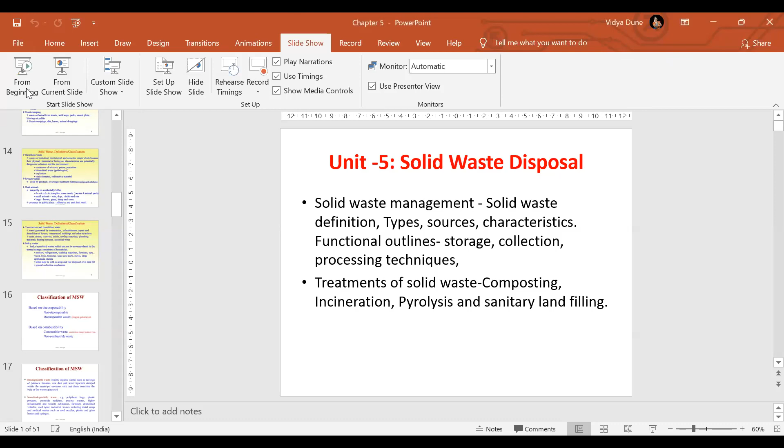I will start the presentation immediately. A solid waste disposal chapter. In that we are going to study about solid waste management, then its sources, then functional outlines, storage, collection, and its processing. Okay.

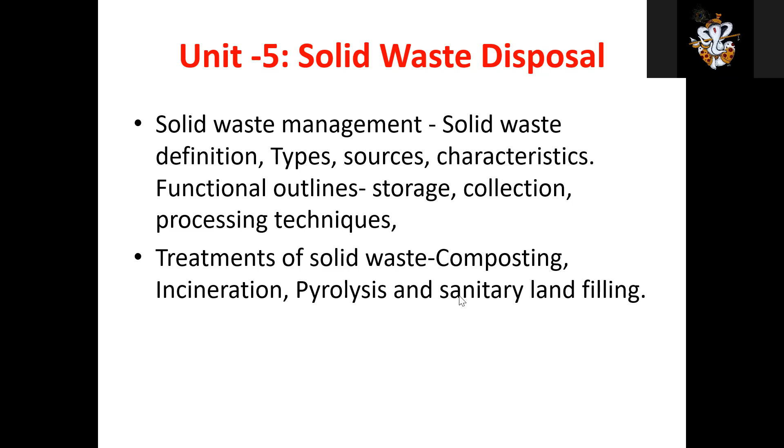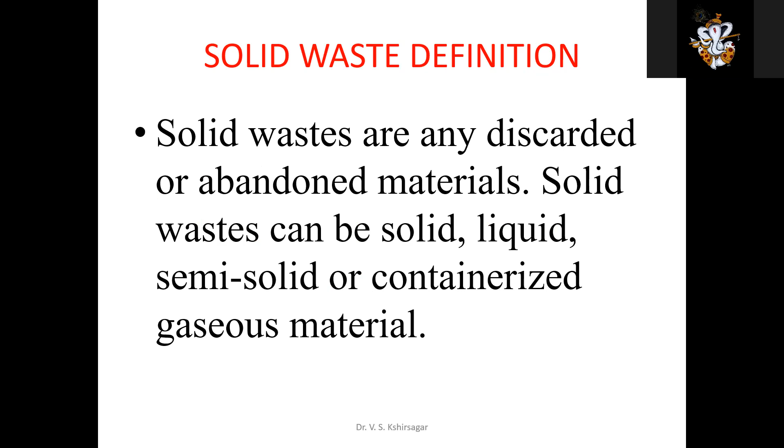Okay, treatments of solid waste. So the first part we finished in yesterday's lecture. Now we are going to study the second part. Okay. This is the solid waste definition: discarded or abandoned material. Okay. So we have discussed the definition also. There are different types of definitions.

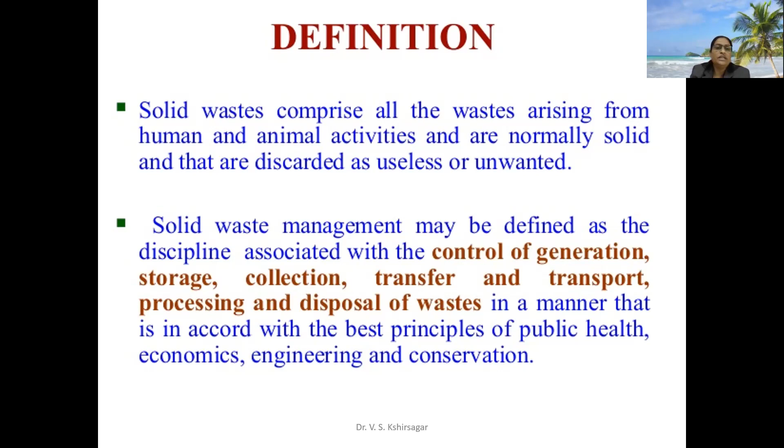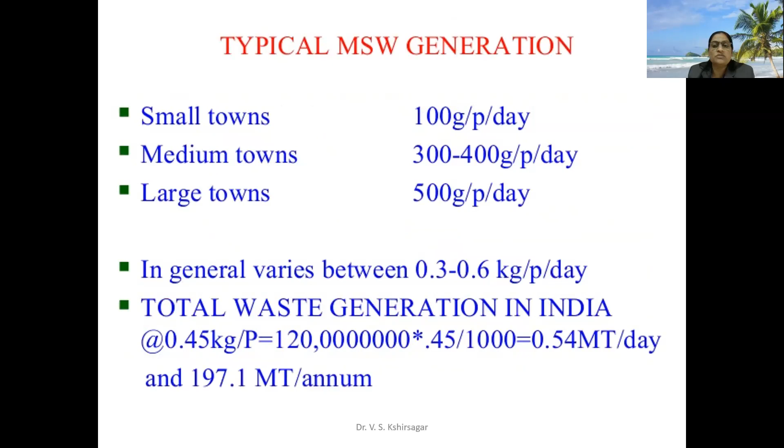Okay, whatever useless or unwanted material in solid form will be considered as solid waste. Then we discussed the typical municipal solid waste generation rate, and in that I told you India, as a developing country, ranges between 0.3 to 0.6 kg per capita per day. Okay, and after that we have seen the different types of classification of solid waste.

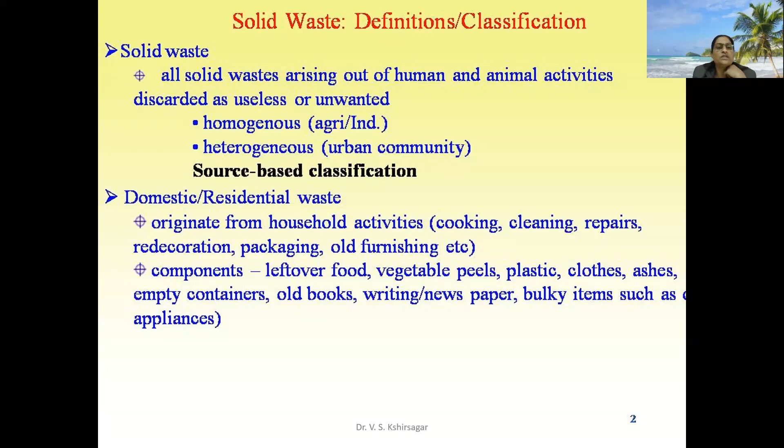In that, solid waste is basically classified into homogeneous or heterogeneous. Homogeneous in the sense uniform, same type of solid waste, likewise from a specific industry or specific area of agriculture. Then heterogeneous, under that there will be a variety of solid waste. Okay. Then source-based classification. Under source-based classification we discussed domestic waste, commercial waste, institutional waste, municipal waste, industrial waste, agricultural waste.

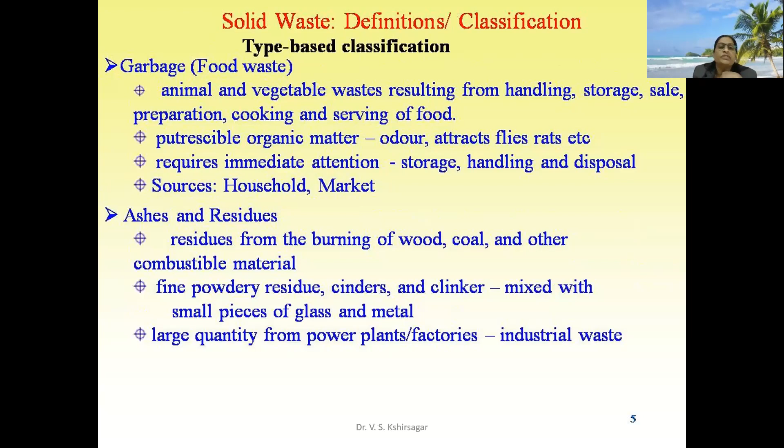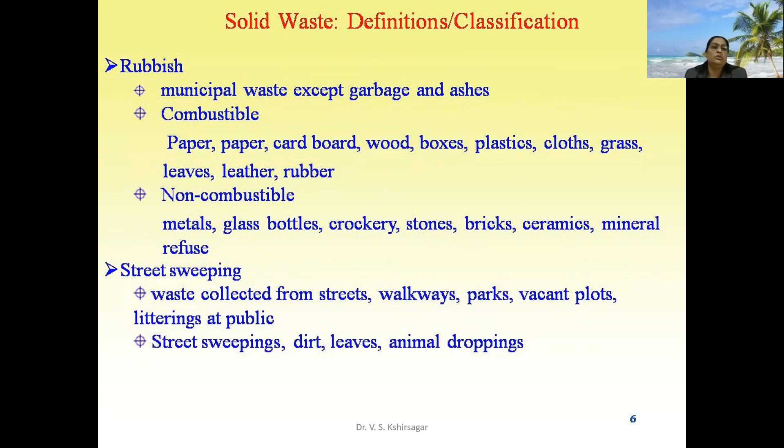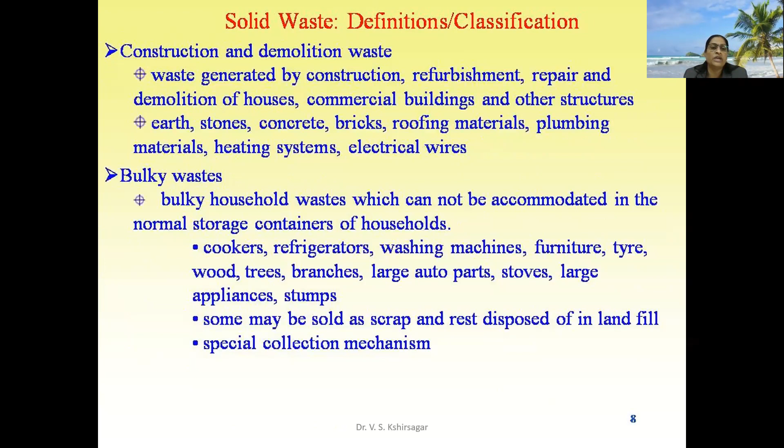Further, we discussed the various types of solid waste in type-based classification. In that, garbage, which includes putrescible organic waste material, then ashes or residues, then rubbish; apart from ashes and garbage, whatever part is there from the municipal corporation will be included under rubbish. Then street sweepings, hazardous waste, sewage waste, dead animals, construction and demolition waste, and bulky waste. So these are the various types of solid waste we discussed in detail in the last lecture.

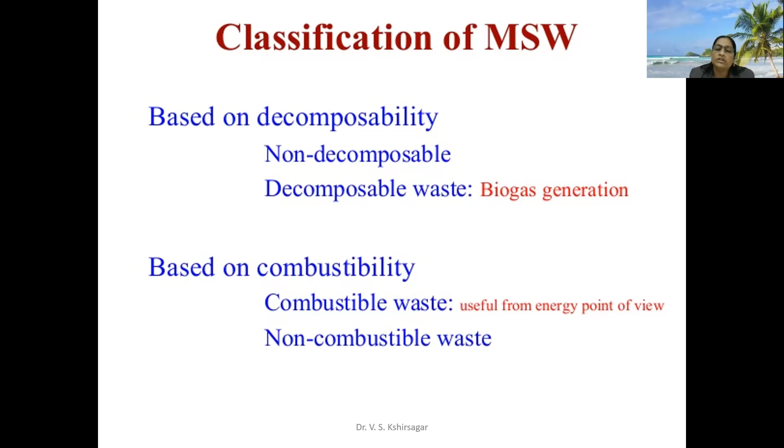Then based on combustibility, it is also classified into combustible waste and non-combustible waste. Combustible waste produces energy, and non-combustible waste does not. But like the non-decomposable material, we can send the non-combustible material also to the same industry as a raw material, or we can reuse it, recycle it. Okay. Then this we have discussed.

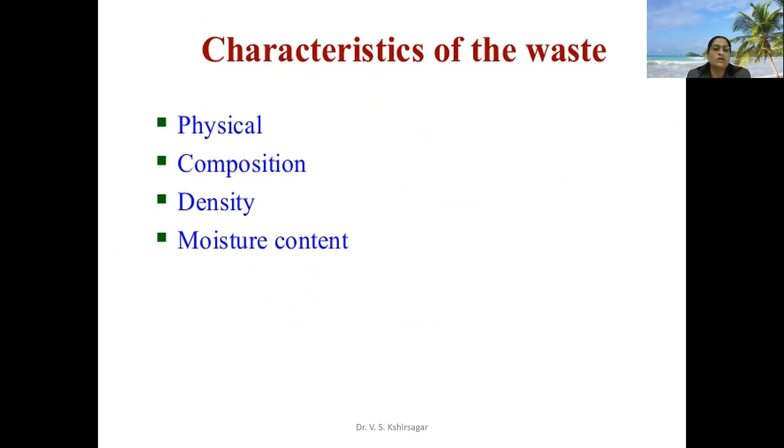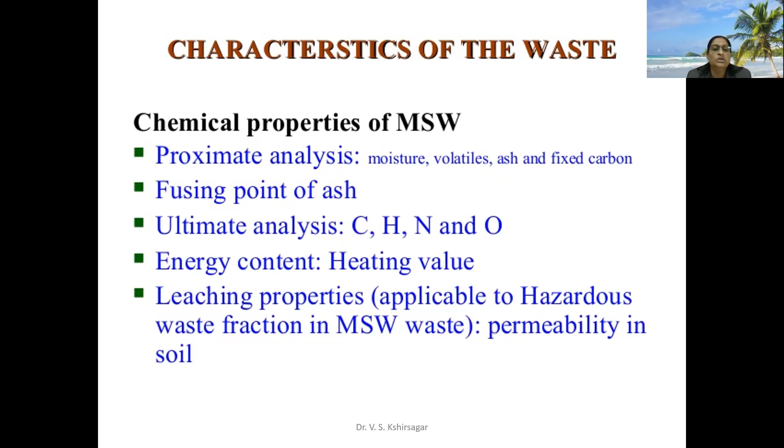Then we discussed the various characteristics of solid waste: physical, chemical; under physical, composition, density, moisture content. Then chemical properties we discussed: proximate analysis, ultimate analysis, fusing point of the ash, energy content or heating value, and leaching properties. All these characteristics we have discussed. And the last point we discussed was the functional outline, meaning how it can be collected from the source up to the disposal spot.

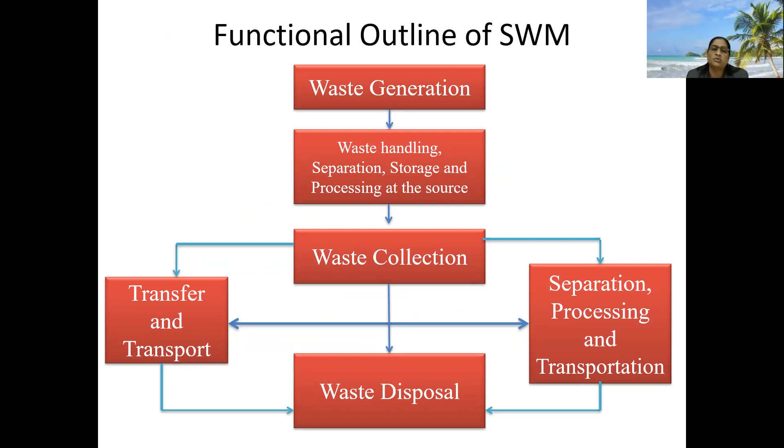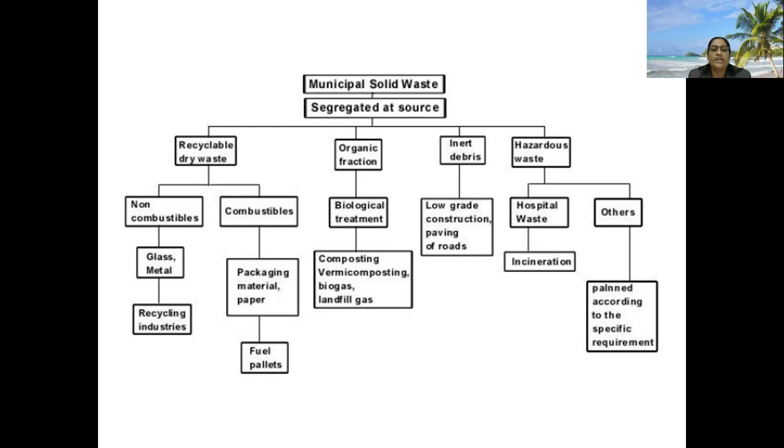Okay, so why do we need to go for segregation? Because only after segregation can we go for proper dissemination of that waste. If it is recyclable waste, then combustible or non-combustible again needs to be classified, and accordingly we can send it. That's why segregation is an important step at the source. Otherwise, collecting together and mixing up will create efforts to be taken towards separation later on.

Whenever you are talking about the disposal of solid waste, you should remember the 3R formula. What is this 3R formula? First R stands for reduce, second R stands for reuse, third R stands for recycle. Reduce means at the source itself, you should work on reduction of solid waste. I can give you an example. Suppose you are using a newspaper for reading purposes. Okay, with one example I can explain all three parts. Basically we use a newspaper for reading the news and getting to know information about various aspects.

Okay, then if you want to reuse the solid waste, in that case the same paper you can use for multiple other tasks, wrapping purposes or covering purposes. So a variety of work you can get done with the same paper. Then recycle: if all this work is done with one single paper, then you can send it for recycling to the same industry as a raw material.

Same example you can take the plastic. First of all, you should reduce the use of plastic. You should not go for plastic until and unless it is required, because you know that it is harmful to the environment.

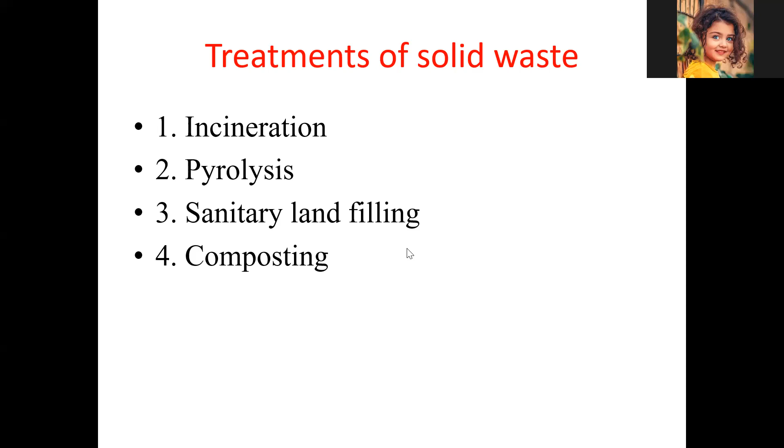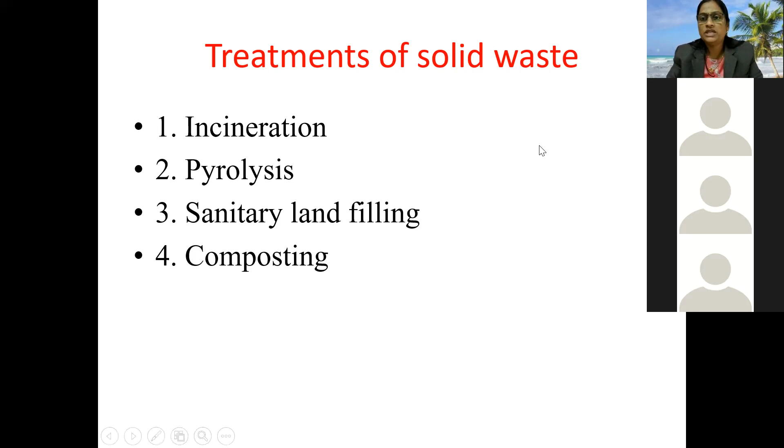Incineration. Now we will talk about incineration first. Incineration means what? It is closed conduit burning at a very high temperature. At high temperature you can burn, even metals also can be burned.

Specifically, incineration can be used for septic hazardous type of material, meaning biomedical waste as well as hazardous material, toxic material, which are going to seriously damage the environment. In that case, we can go for incineration because it is a complete burning.

The biggest advantage is that incineration is performed in the presence of oxygen. Higher temperature can be raised to the highest level. Another biggest advantage of this is volume reduction - around 80%, 90% volume will be reduced.

With respect to solid waste, we discussed that 0.3 to 0.6 kg per capita per day is the solid waste generation rate. If this much generation rate is there, you can imagine - Modi ji says that India has 125 crore population, and multiply that across 365 days. So in 1 or 2 years, if you are not performing any activity to dispose of solid waste properly, entire India will get covered with solid waste itself. I'm trying to make you clear how this scenario is going to be affected, so that's why we need to control it properly.

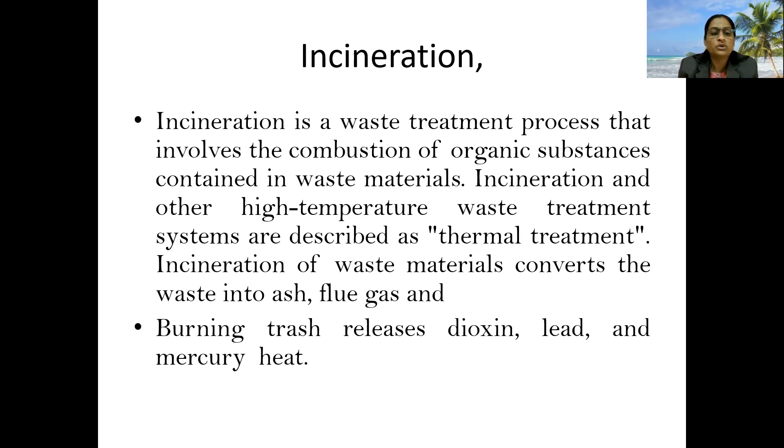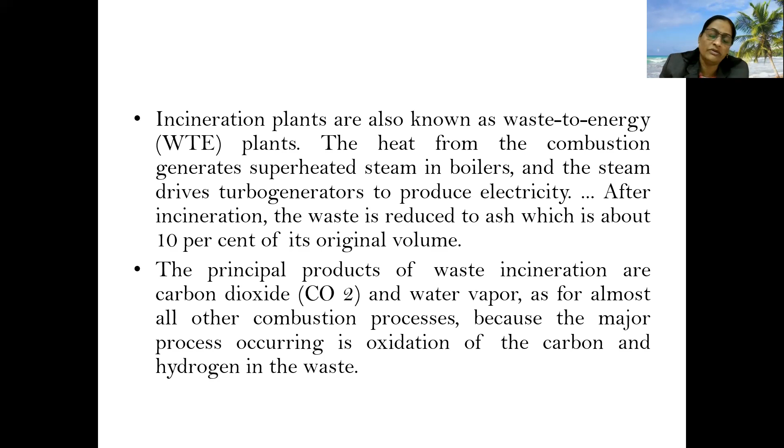So bottom line, once again I will give you a recall of incineration. Incineration is a thermal treatment process. It can be used specifically for biomedical waste and hazardous waste. This process is burning, performed in presence of oxygen - meaning this is combustion, performed in presence of oxygen. Then there's a reduction of volume up to 10% of its original form, and emission of odorable gases needs to be cleared or passed out through the stack or chimney, and then heat generation can be accumulated and converted into useful form. So this is about incineration.

Now another technology we are going to talk about is pyrolysis. Pyrolysis is a process of chemically decomposing organic materials at elevated temperature in the absence of oxygen. This process is also one kind of burning, but it is in the absence of oxygen. A very simple or common example I can give you to understand the concept of pyrolysis is the preparation of rice in a pressure cooker. Are you getting it?

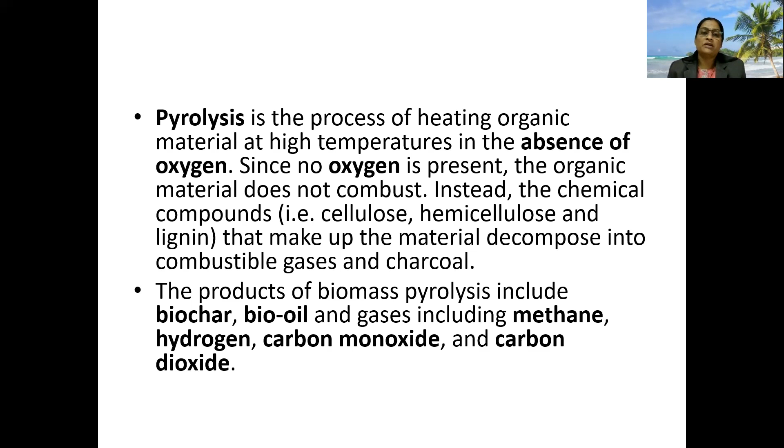So the products of biomass pyrolysis include biochar, bio oil, and gases including methane, hydrogen, carbon dioxide, and carbon monoxide. These are the products we can get from the process of pyrolysis.

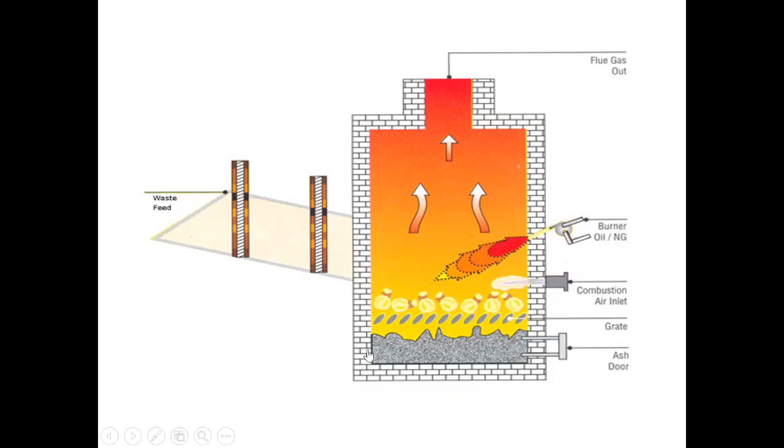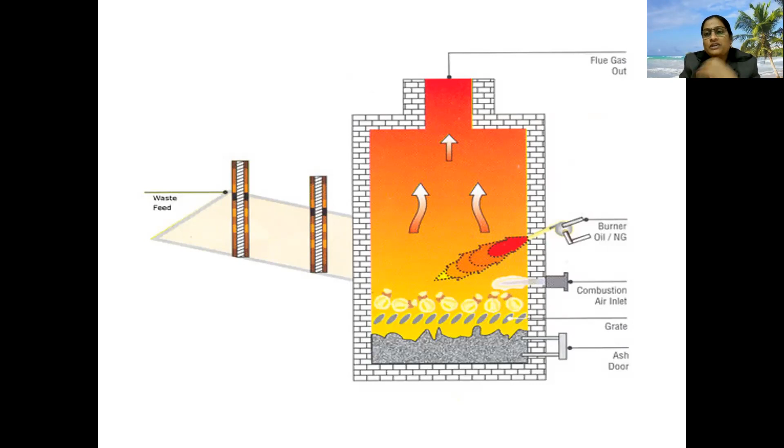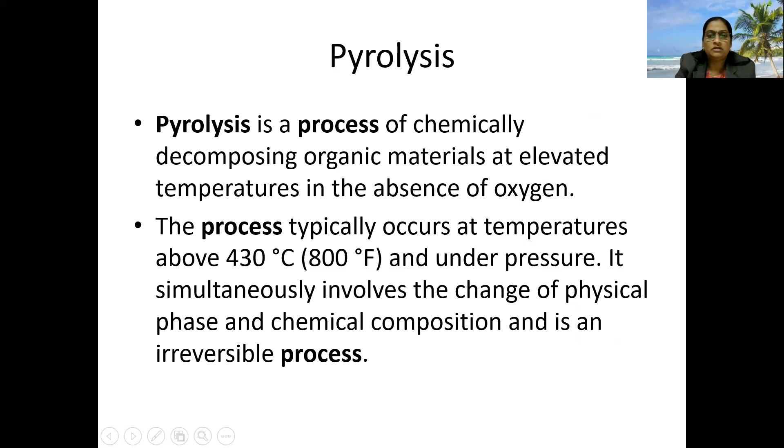Vidya and Snehal replied that it is over. I assume that others... oh my God, this figure is different. Are you sketching the same figure? Or are you not sketching? When did it change from my side? Shit. Have you drawn this figure? Yes, ma'am. Okay, yes ma'am. Okay, good.

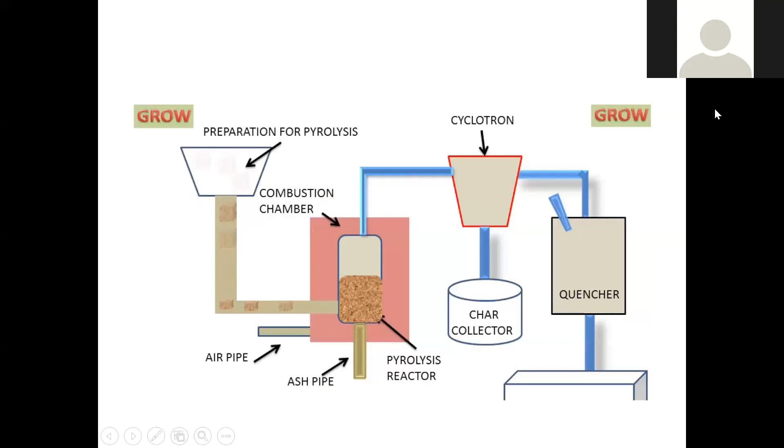Here the process is shown in short: the preparation for pyrolysis, combustion chamber, air pipe, ash pipe for removal of ash particles, pyrolysis reactor. Then the gases can be collected to cyclotron, and then charcoal will be collected at the bottom.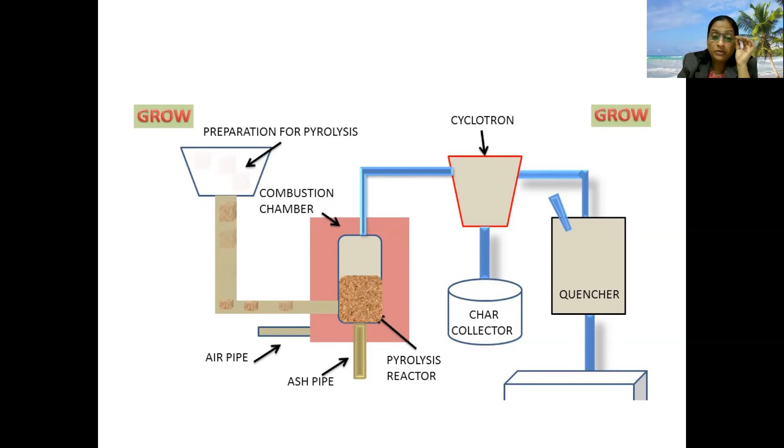This is a little complicated process. I'm not understanding the quencher part properly. I have added that figure, but I'm not properly able to explain that. I will understand it and explain this figure in the next lecture.

In general, the pyrolysis of organic substances produces volatile products and leaves a solid residue enriched in carbon, char. Char is the charcoal. The process is used heavily in the chemical industry, for example, to produce ethylene, many forms of carbon and other chemicals from petroleum, coal, and even wood to produce coke from coal. So these are the multiple types of products that can be developed from the process of pyrolysis.

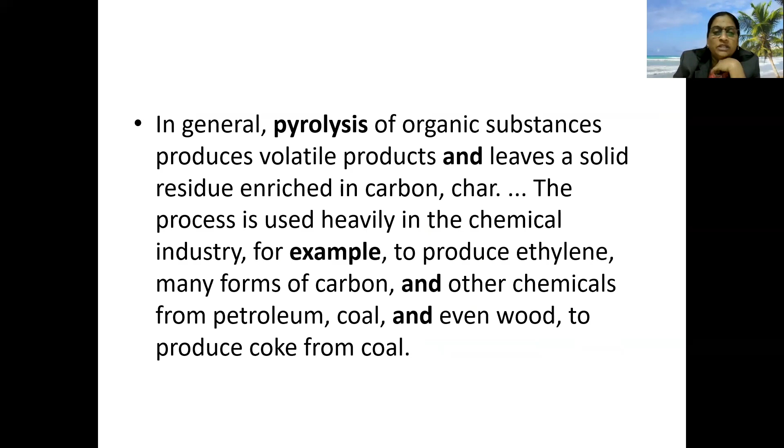So it is an effective method for disposal of solid waste. Okay, what are the disadvantages of pyrolysis? The primary disadvantage is that the product stream is more complex than for many of the alternative treatments.

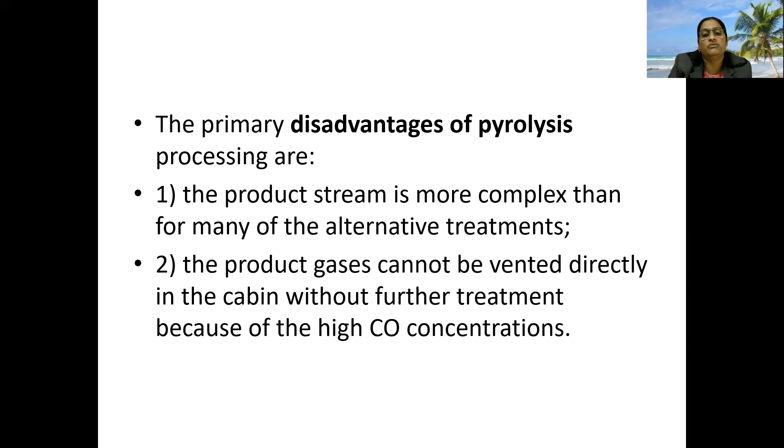Incineration is an exothermic process, while pyrolysis is an endothermic process, which needs to absorb a large amount of heat, while the end products of pyrolysis are fuel oil and fuel gas, which are convenient for storage and long distance transportation

as a heat source. Okay, बऱ्याचदा आपण बघतो बघा, कोळशाच्या गाड्या जातात from कोळसा. That कोळसा, that is not only we are using for the adsorbent purpose, we can also use as an energy source. Okay, burning purpose. So this is the difference between incineration and pyrolysis method. Okay, any question about incineration and pyrolysis?

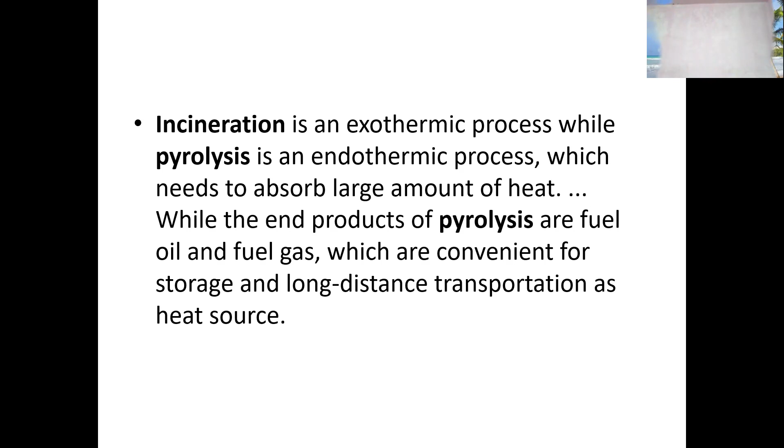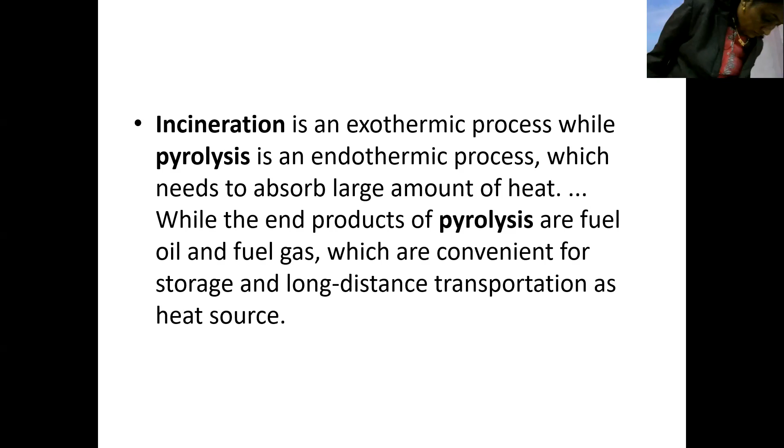I will take 1 minute break. No question, no doubt. Okay, we'll proceed.

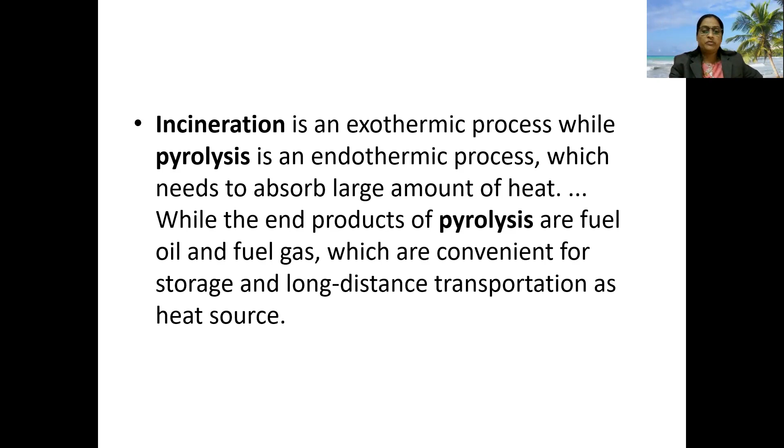Okay, next treatment method we are going to talk about is sanitary landfilling, or open dumping. Sanitary landfills are the sites. Background I will give you before starting the process of landfilling. You know that whatever solid waste we collect, we have a habit to either dispose beside the area or burn it simply. Okay, if it is burning, it is producing air pollution.

If it is thrown away, and if it is decomposable material, and if you are not providing a controlled system for decomposition, then also it is going to get decomposed.

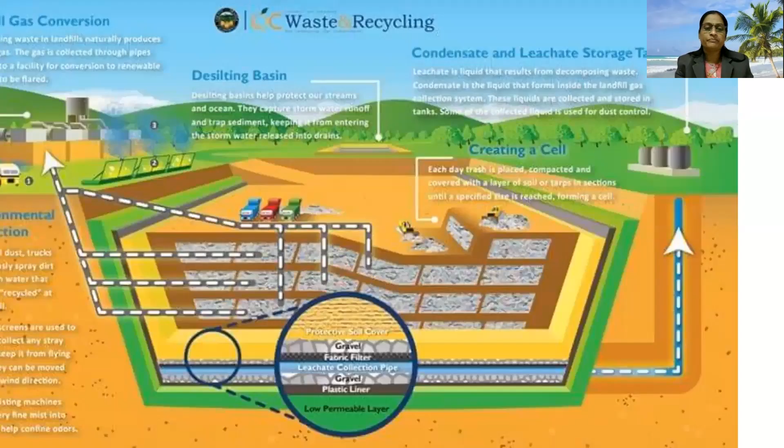And what are the sanitary landfill features? I will show you with the figure first, and then we'll come back to this. So you can look at this figure. There are many cells formed. First of all, solid waste. This brown, ash color is for the solid waste. Then it is covered with soil, compressed by applying pressure, and again there will be another cell of solid waste, again covered with soil, again compressed by applying pressure. Likewise, multiple layers can be formed until it reaches the ground.

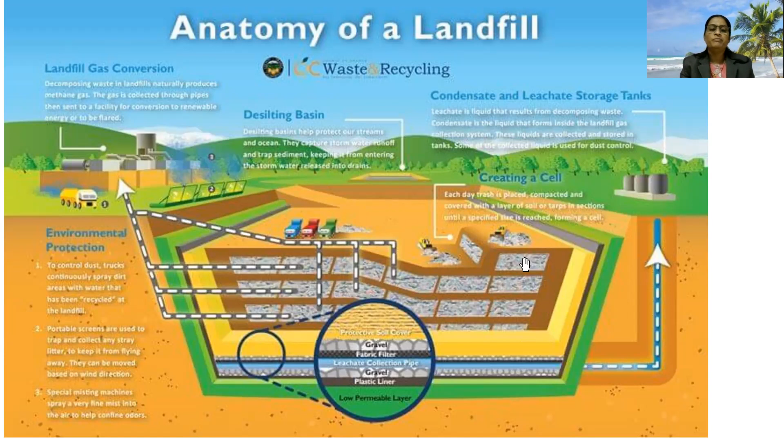It is a subsurface level process. So until it reaches the ground, multiple alternate layers of solid waste and soil can be formed, and every time it will be compressed by applying pressure. Okay, so compression is for volume reduction. Then I will go back to this other figure. Here the cell formation is not shown, but it is like this. You can look at this figure here, collected leachate. A slope is given to one side of that particular pit, because the slope will help collect the liquid waste generated during decomposition, that is leachate, towards that end. And from there, it can be pumped out.

So instead of allowing it to percolate towards the ground, it will be collected from that spot directly by providing a pumping system. How is it going to be collected at this corner? Because we have provided a slope. Is this the only reason? No, because we have restricted it from percolating towards the ground by providing a plastic liner on the inner side of this particular pit. So it will not be allowed to percolate towards the ground. This plastic liner will restrict that.

Then another issue, there is production and emission of gases. So these multiple pipes are provided for the emission of gases produced during decomposition, and this can be collected and recovery of the same gas can be performed by further processing. So this way sanitary landfill helps to reduce the volume of solid waste, first thing. Second, it is not only for the reduction of volume, it will also not allow odorous gases into the atmosphere, not allow the leachate to percolate into the groundwater table, and the process of decomposition will be performed effectively. Okay, so let me

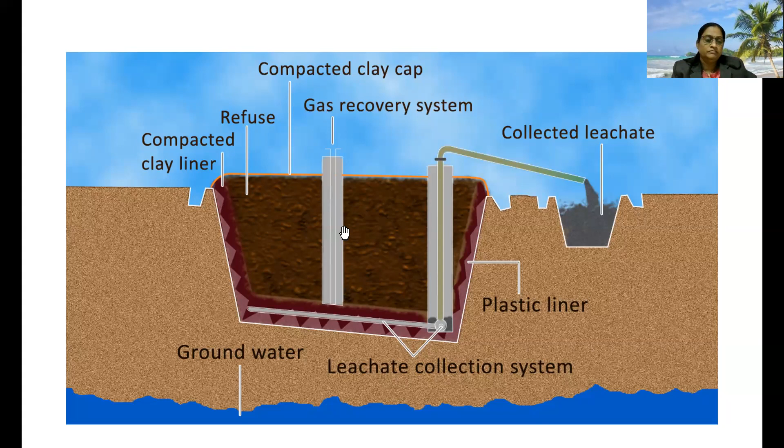This is the anatomy of a landfill.

Okay, we'll go with the slide. Sanitary landfills are sites where waste is isolated from the environment until it is safe. It is considered safe when it has completely degraded biologically, chemically, and physically. In high-income countries, the level of isolation achieved may be very high.

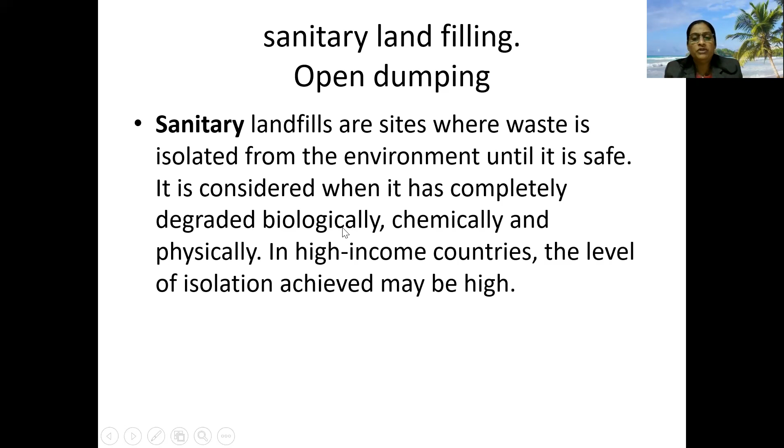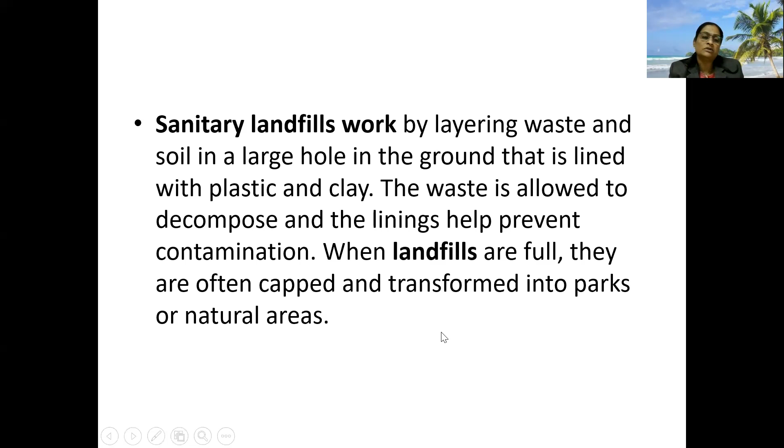Sanitary landfills work by layering waste and soil in a large hole in the ground that is lined with plastic and clay from the bottom side. The waste is allowed to decompose, and the linings help to prevent the contamination of water as well as air. When landfills are full, they are often capped and transformed into parks or natural areas.

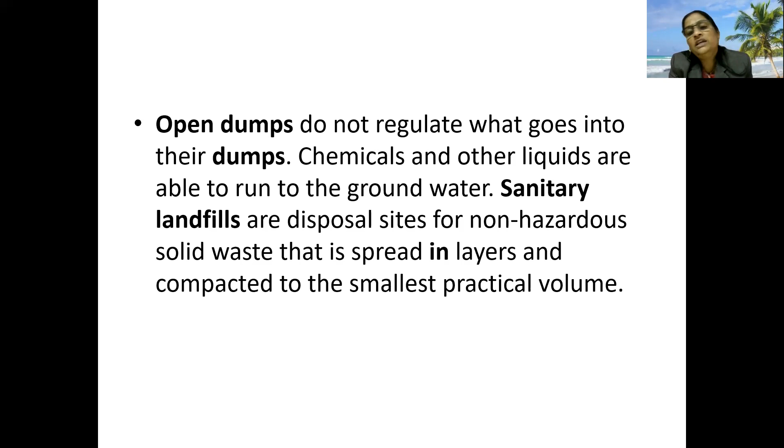Okay, open dumps do not regulate what goes into their dumps. Chemicals and other liquids are able to run to the groundwater. Sanitary landfills are disposal sites for non-hazardous solid waste. Remember this one: not for hazardous solid waste. For hazardous, we can go for incineration. The waste is spread in layers and compacted to the smallest practical volume.

Sanitary landfills are sites where waste is isolated from the environment until it is safe, when it has completely degraded biologically, chemically, and physically. The main purpose of a sanitary landfill is to ensure waste is safe by reducing the harm from accumulated waste and allowing safe decomposition. Alternating layers of garbage and soil aid in hastening the decomposition process effectively.

Sanitary landfills are less hazardous to the environment. Open dumps are very hazardous to the environment because they allow liquid to percolate into the soil and the ground. They allow odorous gases to escape. They allow the growth of mosquitoes, flies, bacteria, microorganisms, etc.

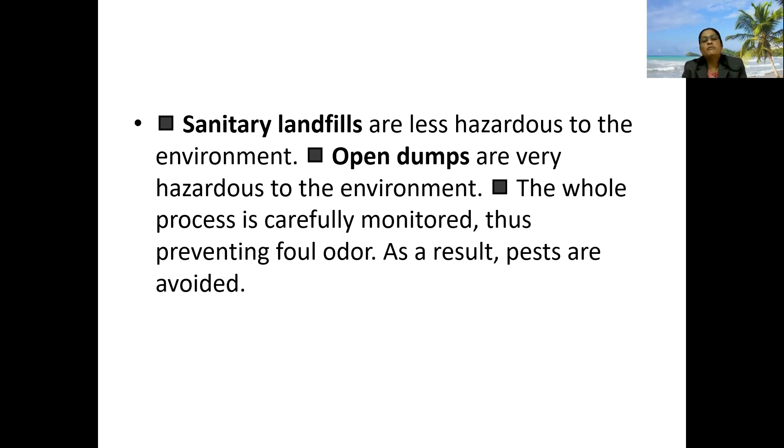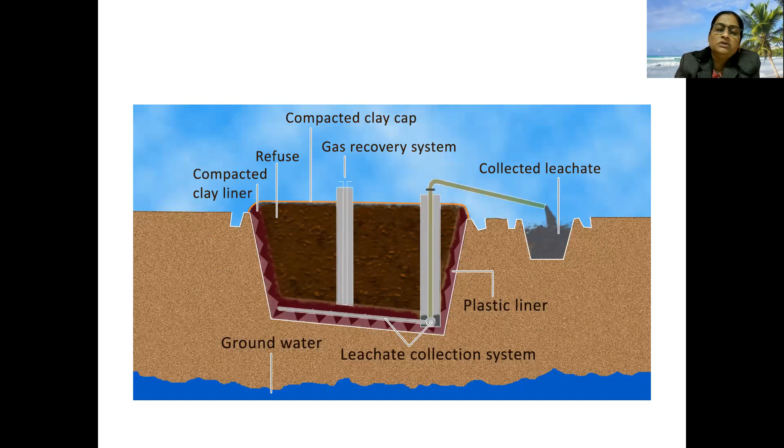The whole process is carefully monitored, thus preventing foul odor. As a result, pests are avoided. There will be no growth of pests if it is a controlled system. Okay, so this is about the landfill. I request everybody to draw this figure. Please, fast.

Done? No, ma'am. 1 second, please. Okay, okay, wait. I will wait. No problem. Done, ma'am. Okay.

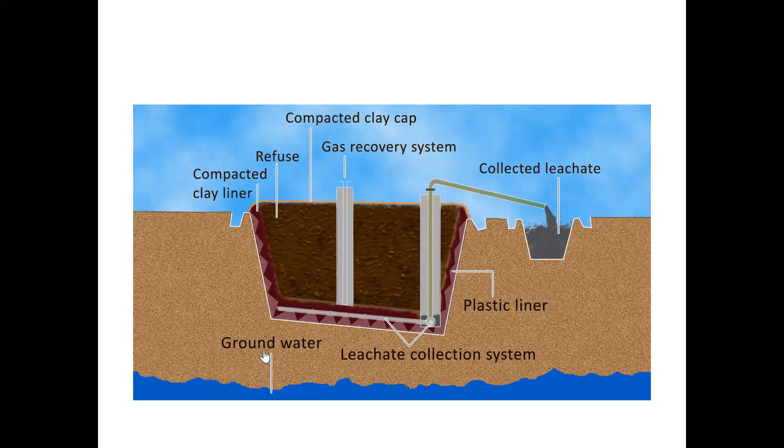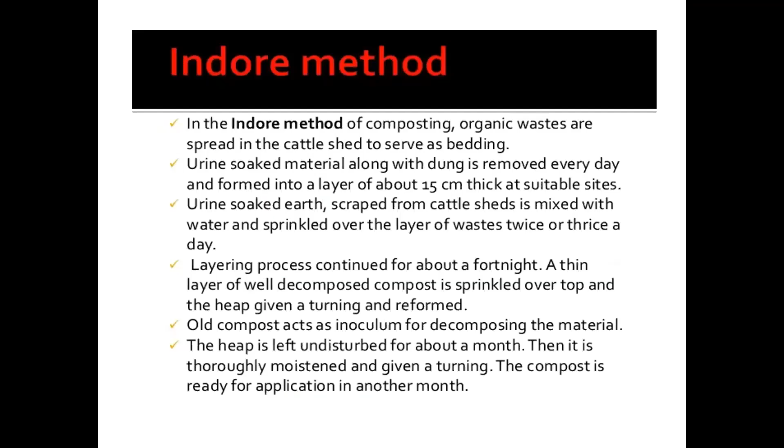And the last technology is composting. We are used to this treatment actually; it is a popular technology. Composting is the biological decomposition of organic waste. Decomposable material can be disposed of by using composting technology. It is the decomposition of organic waste such as food or plant material by bacteria, fungi, worms, and other organisms under controlled aerobic conditions. It should be under controlled aerobic conditions.

It can be anaerobic also. The end result of composting is an accumulation of partially decayed organic matter called humus, and that can be used as manure for agriculture. Composting requires making a heap of wet organic matter, also called green waste, such as leaves, grass, food scraps, and waiting for the material to break down into humus after a period of months. Sometimes it requires 3, 4, or 6 months; depending on which composting technology you are using, the period will change.

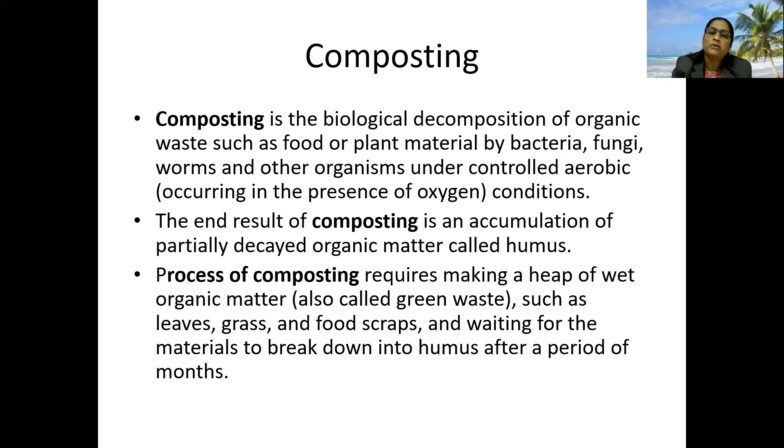At a very small place you can make small trenches and put this material in them. After 3 or 4 months, it will be converted into humus, and that you can use as manure for the plants. These experiments you can perform at your own house also.

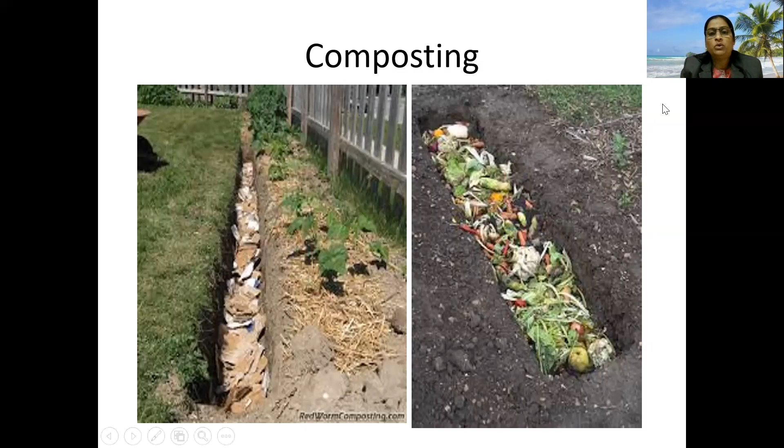What is composting? The rapid biological decomposition of organic matter into an inorganic form available for plant uptake. Note this down, please: the rapid biological decomposition of organic matter into inorganic form available for plant uptake as manure. So microorganisms turn organic matter into plant food, and there is a nutrient cycle.

Breeding of microorganisms or worms: if you are not providing a controlled system for decomposition, there will be breeding of microorganisms. Then this is my approach to composting. Our goal in composting is to provide microorganisms with the food they need to thrive, and thus rapidly decompose organic materials while retaining the maximum amount of nitrogen in those materials. Okay.

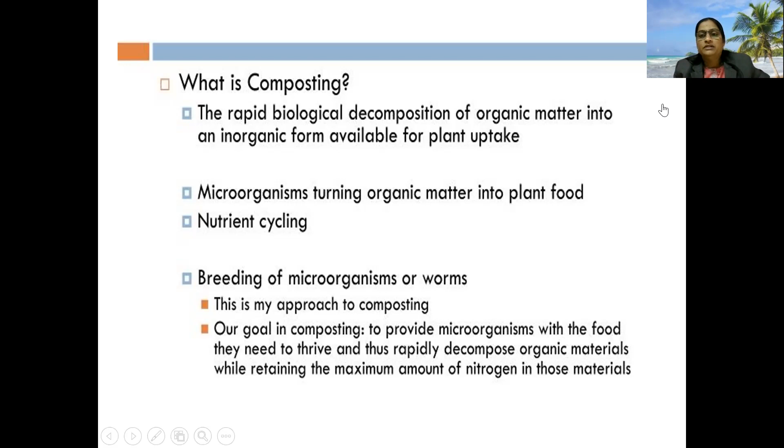So there are different methods of composting: Indore method, Bangalore method, Nadep method, and Coimbatore method. The Nadep and Coimbatore methods are not that widely accepted, but the Bangalore method and Indore method are highly accepted. Multiple methods are there, like the Deen Bandhu method, but the common ones are listed

over here. The Indore method was developed by Howard and Y.D. Wad at the Institute of Plant Industry in Indore. The Bangalore method was worked out by L.N. Acharya at the Indian Institute of Science, IISc Bangalore. For the Nadep method, demonstration at a larger scale was initiated at J.N. Krishi Vidyalaya, Indore. And the Coimbatore method was introduced by Manickam at Coimbatore in 1967.

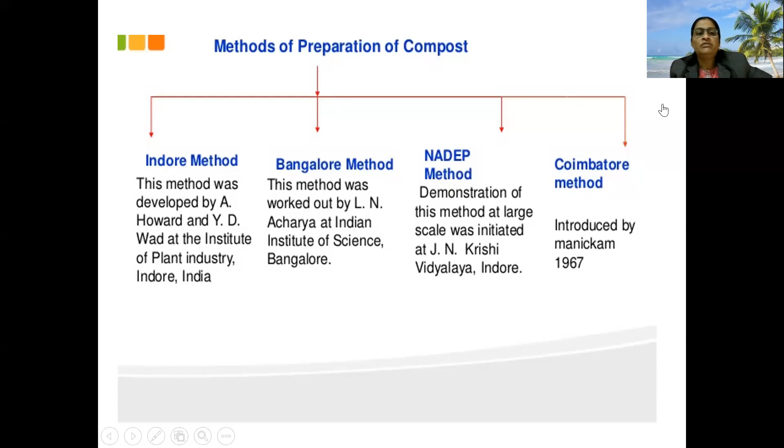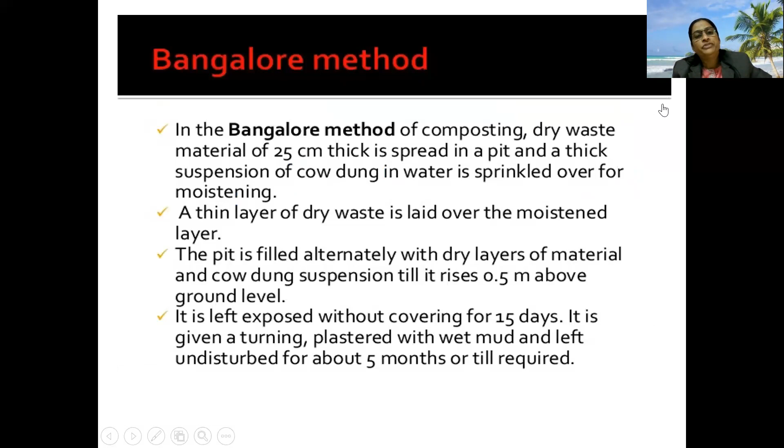So this is about the fundamentals. In detail, we will see what the Indore method and the Bangalore method are, as these are the two important and popular methods. Now, what is the difference? In the Bangalore method of composting, dry waste material 25 centimeters thick is spread in a pit, and a thick suspension of cow dung in water is sprinkled over it for moistening. Okay, we can spread that